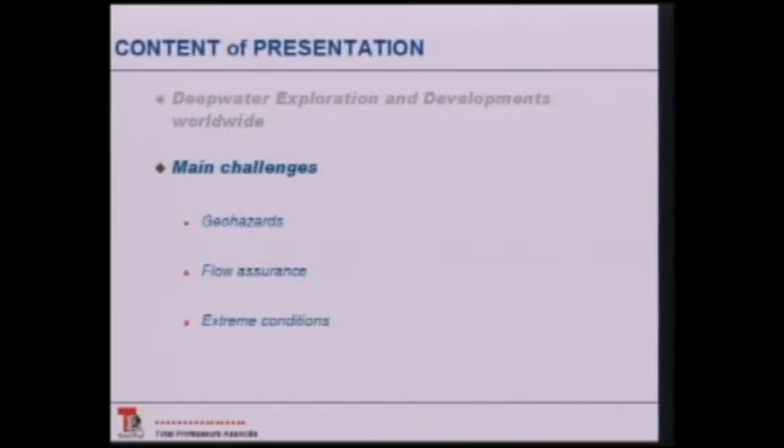So I'm going to present deep water on a worldwide basis. Then I will go through some main challenges of this activity, what we call geohazards. Geohazards are all the problems associated with the bottom of the sea, with the geology. You will see that in deep water, the bottom of the sea does not behave like it does in shallower water or onshore. I'm going to talk about flow assurance.

Flow assurance is the name given to the various methods which are utilized to ensure that the effluent produced by a well will reach the storage vessel on the surface.

And I'm going to talk about various extreme conditions in which this activity is being handled these days. If I have time, I will mention two examples of deep water fields: the Girassol field offshore Angola in an average of 1,500 meters of water, and the Canyon Express in the Gulf of Mexico in US waters.

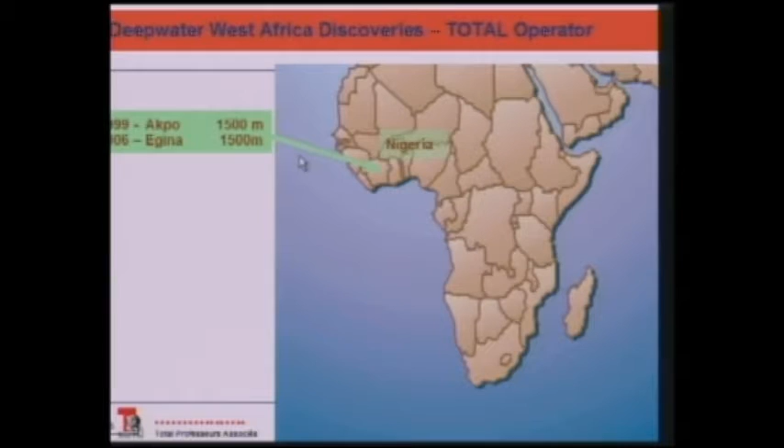I used to work for the Total Oil company as a development engineer, and I'll mention a few discoveries which have been made recently. For example, in Nigeria in '99, 1,500 meters of water, we found Akpo. I was involved in this one. Then we found Egina, 1,500 meters, Moho in Congo, Bilondo in Congo as well, and a lot in Angola.

The latest being Manjericão, in 2,000 meters of water. So far, we have developed Girassol, Dalia, Lirio, and that's about it. They are in production.

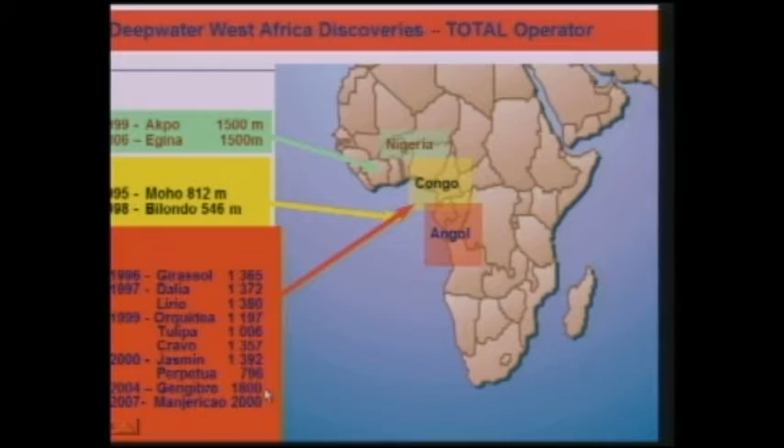All the other reservoirs have not yet been developed, are not producing, but they are under study because there are no identical reservoirs. They are all different, so it's always a different case, and we have to spend a lot of time studying the best way to develop each and every discovery.

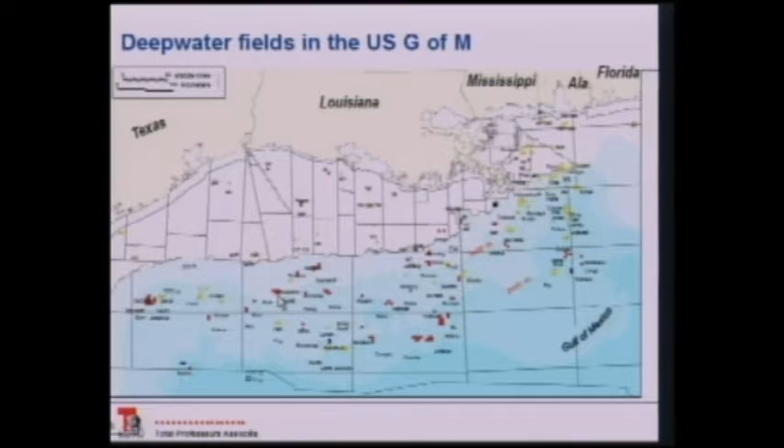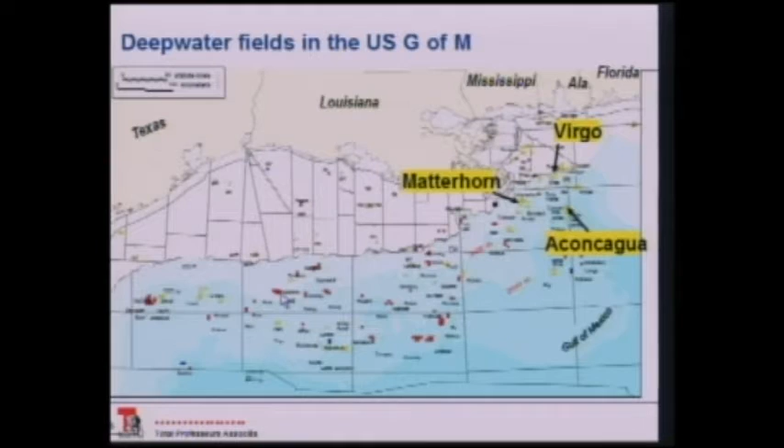And all the dots are either production or exploration of hydrocarbons in deep water. Our company was involved in Virgo, Matterhorn, Aconcagua. So that's just to show you that this is a very recent industry, I would say about 15 years old, but there is already a lot of development.

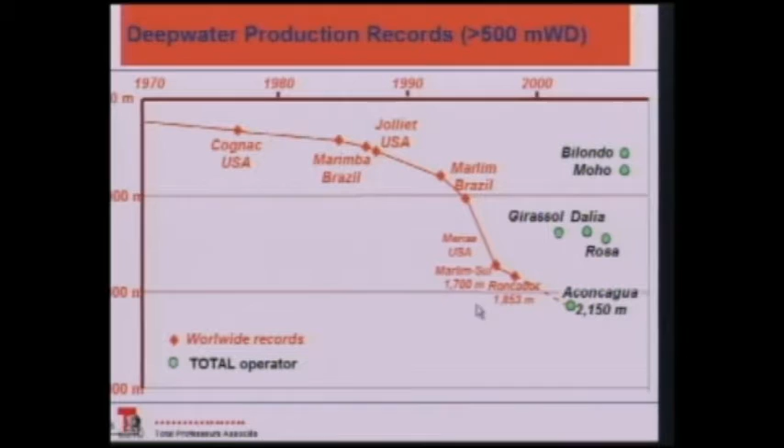So why do we go and try to find oil in deep water and ultra deep water? It's because you've heard that the world is going to run out of oil, and we try to exploit oil everywhere we can. And it's not negligible.

The industry estimates that the reserves are 200 gigabarrels. That means 200 billion barrels. I would say these days the quantity of oil which is recoverable, conventional, is 1,000 billion barrels. So it's almost 20% reserve.

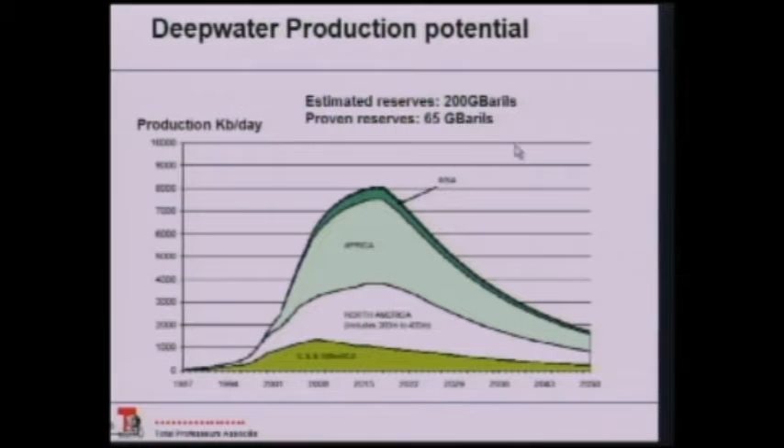Proven reserve is when you are sure that the reserves are there, that the oil is in the ground. You have been drilling, you have been making all sorts of studies. So far it's only 65 billion barrels of oil, which is very interesting. I don't know the reserve of Mexico, but it should be in the same order of magnitude.

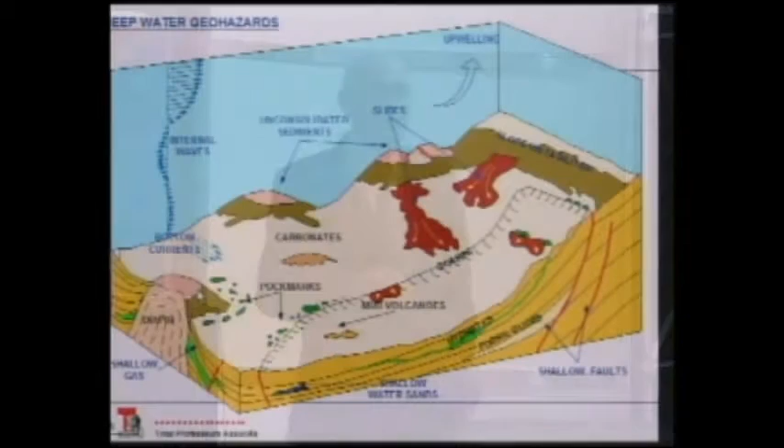So the first problem you can meet is diapirs. A diapir is a mountain of salt that crops up from the seabed like this, and quite quickly. If you don't know there is a diapir underneath and you have installed a pipeline here, there will be a problem. So you better make a very good survey before you start locating your equipment.

You have mudslides. The soil is not compacted, it's very unstable, and sometimes there are huge mudslides. A mudslide like this can be 20, 30 kilometers long.

You have mounds of carbonates. You can have pockmarks. I will explain to you what a pockmark is by showing you some seismic pictures, derived from the seismic.

You have hydrates. Hydrates are a big problem. I don't know if you know what a hydrate is. A hydrate is the result of the mixture of water and hydrocarbon gas, like methane. Under certain high pressure and low temperature, the water and the gas make some sort of ice. It looks like ice, and it can block things. For example, if you have that in a pipeline, you will block the pipeline. You can have a plug in the pipeline made out of hydrates under certain conditions.

In deep water, you have water at 4 degrees temperature. On the seabed, everywhere in the world, the water is at 4 degrees. You have gas coming out from the sediment, and when the water and the gas meet, it makes hydrates. And it makes a hydrates layer just below the seabed.

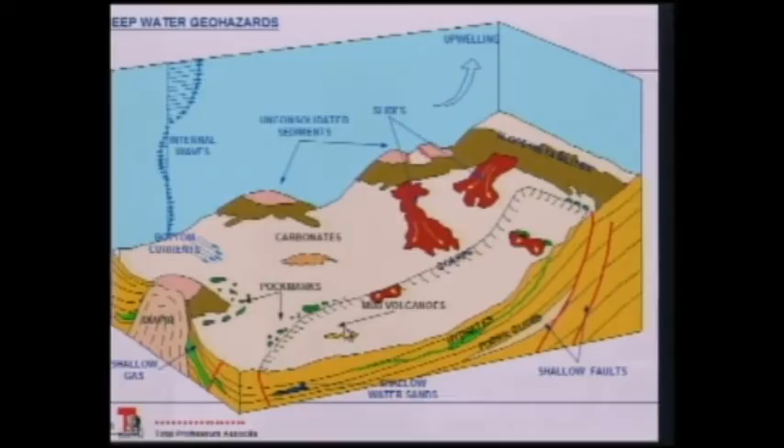You can also meet mud volcanoes. If your equipment is installed close to a mud volcano that erupts on the seabed like that, you are in trouble.

So that's some of the problems you have to take care of in deep water. This is a view - it's not a picture, because this is about 1,500 meters. This is probably 20 kilometers by 10. So this is a top view of a seabed.

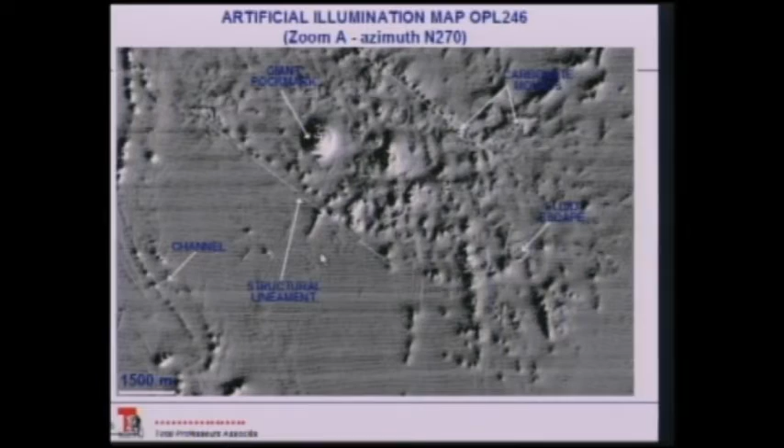offshore Nigeria on the Akpo field. You can see, for example, here a number of faults, channels, and a pockmark - I will show you what a pockmark is. So if you have to install your equipment somewhere, if you have to drill, you better drill in this area, because all the rest is very unstable.

What is a pockmark? This is a pockmark that we have taken from the previous picture, and this is a vertical cut. How do you see that? This is a 2D seismic view of the soil in depth. You see here the layer of hydrate.

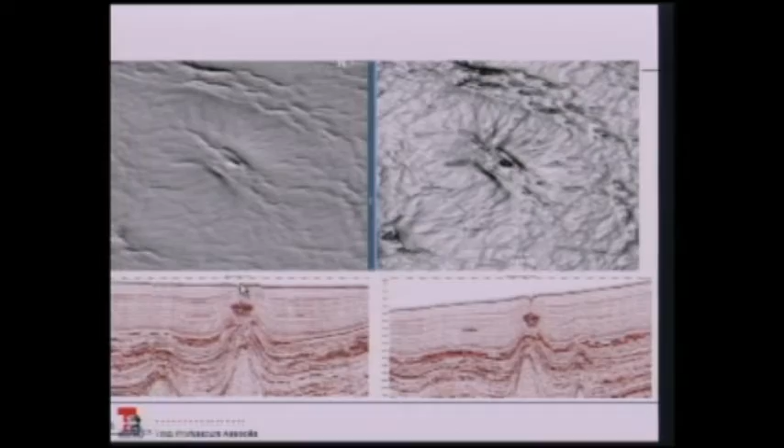Under the hydrate, you have gas trapped. Sometimes there is a leak of this gas. The gas leaks, that's what happened here. And when the gas reaches the surface, you have a pockmark. But you better not be there - if you have your equipment in a pockmark like this, you might lose it.

So before deciding what will be the shape of your development, you better have a very good preliminary soil survey.

Okay, what do we do to develop these fields? How do we work in 1,500 meters of water? We cannot build conventional platforms like you have in the Gulf of Mexico in 100 meters of water. It's too deep. So we use floaters. So this one is called a TLP, a tension leg platform, which is a floater, semi-submersible, with tethers anchored on the seabed, under tension.

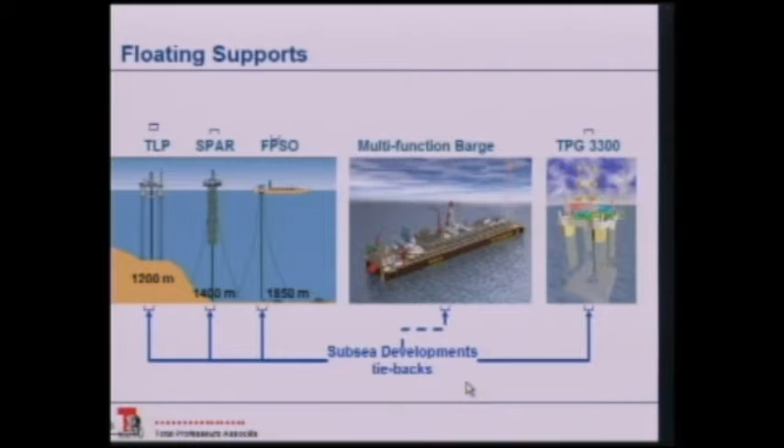These are two very special types of equipment, and I have no time to explain the details. So all these equipments, these floaters, the floating supports, are linked to the subsea development by a number of pipings, a number of links that we call tiebacks. And there are two types of development. Development with the wellheads on the surface, we call that a dry wellhead, like this, and subsea wellhead, subsea development. I will show you later an example of a huge subsea development.

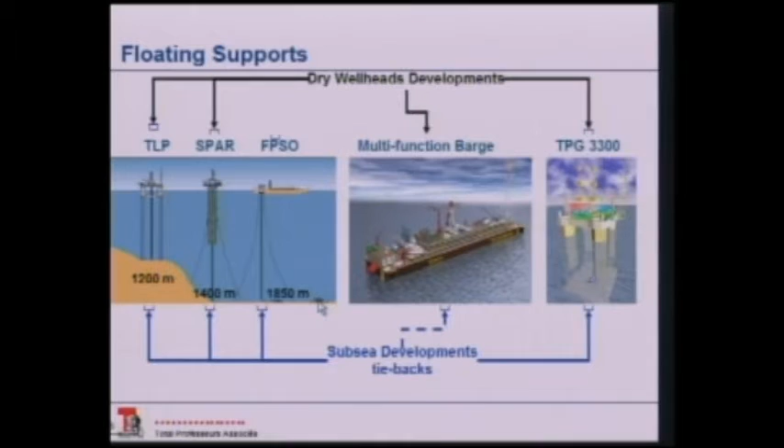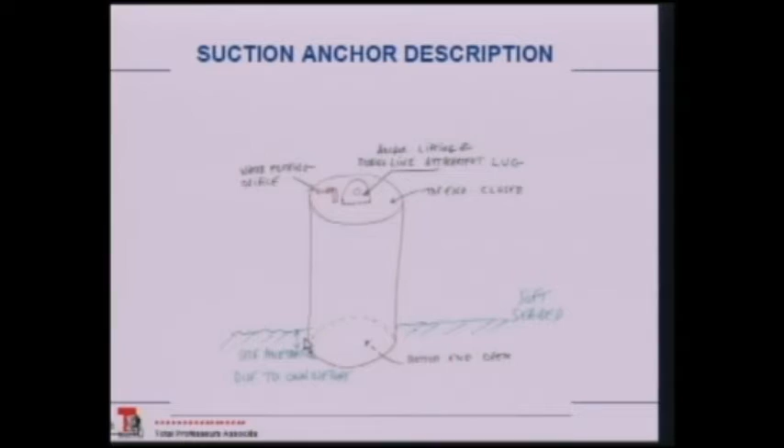So, as you are civil engineers, I wanted to show you how we can moor such big, huge floaters on the seabed. So what we use is a suction anchor. A suction anchor is a big cylinder, about 5 meter diameter, 10 meter high. The bottom of it is open, and the top of it is closed. So you just lower it down on the seabed, and it will penetrate the seabed by, I don't know, 1 meter maybe due to its weight. But that's not enough to install it as an anchor.

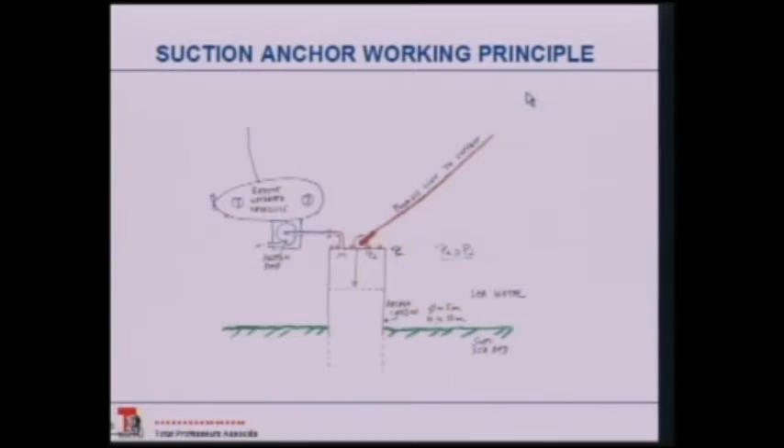What we do, we come with a remote operated vehicle, which is a remote control submarine. This submarine has a pump. It connects the pump to a pipe fitted on top of the suction anchor and starts pumping the water out. So as soon as you start the pump, the pressure inside the caisson reduces, the pressure outside is still the same, and it creates a very important force that drives the caisson all the way down into the seabed. And you have your mooring line going all the way to the surface, to the vessel that you want to moor. This is mostly used in very deep water. The reason being that in deep water, the soil is always very soft and the caisson can penetrate easily.

Okay, the next subject is flow assurance. This is a fixed platform, and not far away offshore you have an FPSO producing oil and gas in very deep water. This is a conventional fixed platform like what you have in the Gulf of Mexico, and the reservoirs are at the same depth. This is the reservoir. But this reservoir is much warmer than this one because the weight of the layer of soil here is higher. You have more sediment than here.

So here the effluent goes out from the well at 80 to 90 degrees, whereas for the same depth of reservoir, in deep water it goes out at just 50 to 60 degrees C. This is due to the fact that the density of the sediment here is much heavier than the density of the water. That's why the temperature here is lower in deep water.

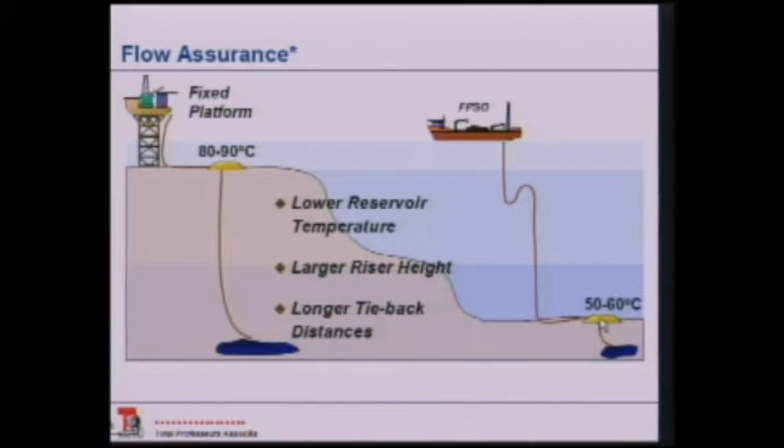You will also see that here the distance that the pipe is running in the water is shorter than in deep water. And when the pipe is running on the seabed like this, the effluents in the pipe are going to be refrigerated. They are going to see the 4 degrees centigrade of the seabed temperature, and the effluents reaching the surface will be at a lower temperature than when they get out of the well. So if your effluents are colder, the viscosity of the effluents is increasing, and it's more difficult to extract this effluent.

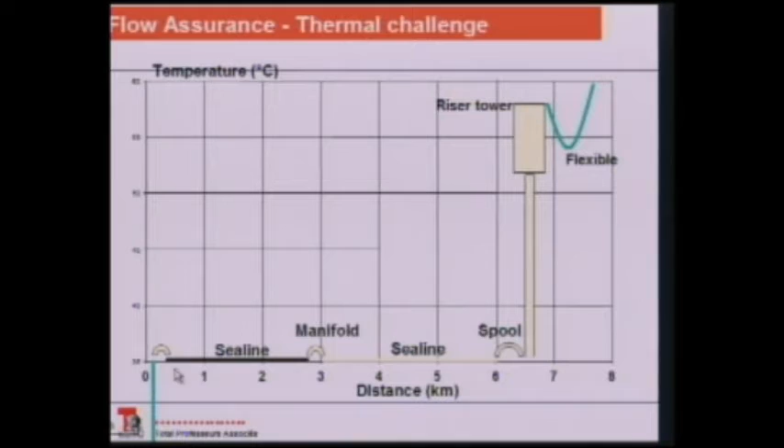So what we normally do, I'm not going to explain in detail this scheme, but what we normally do is we install insulation on, this is a schematic showing the well, the flow line on the seabed, and the riser going all the way to the surface. So what we do, we install insulation on the sea line and on the riser to keep the product warm. And we don't do that normally at a conventional water depth.

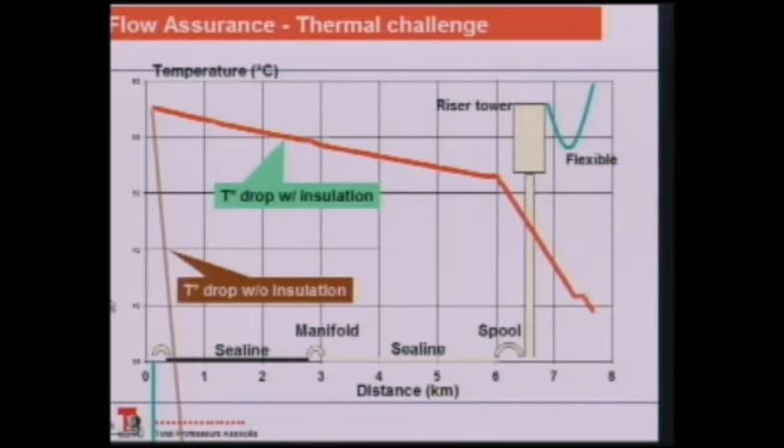So what are the problems associated with flow assurance? One is in deep water. One is the hydrates. The hydrates, what do you do to prevent hydrate? Thermal insulation, heating, and we can circulate the oil in the system to avoid the temperature of oil to drop below a certain figure. We have wax deposition. So we use thermal insulation, we heat the lines, and we pig the line.

We have a phenomenon which is called slugging. Slugging is when you have a mixture of gas and liquid in a pipeline, and all of a sudden you produce only gas, then you produce liquid, then you produce gas again, and this is very disrupting for the production. We call that slugging. So to avoid that, we use what we call the gas lift system, which has to do with injecting gas at the bottom of the riser.

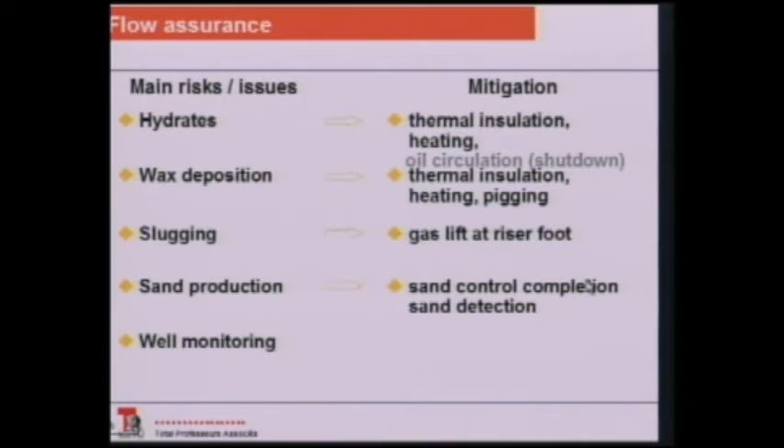We produce sand, so we have sand control completion. In other words, in the wells, we install filters that prevent the sand from being taken away by the effluents. And we have also well monitoring. We check the downhole pressure and temperature, and we test the wells.

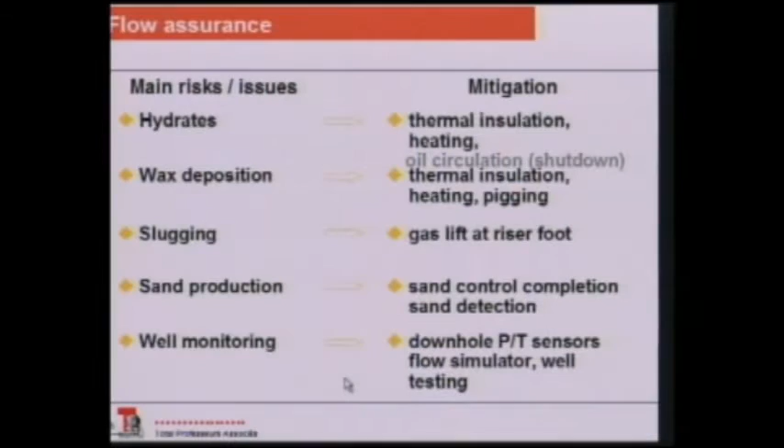Another method is coming these days. You can see the FPSO, you can see the riser and the flow line going all the way to the wellhead. So in order to be able to circulate the oil from the well to the vessel at a very long distance, here we show distance between 10 and 25 kilometers, what we do is we install a multi-phase pump on the seabed, close to the wellhead. These pumps are able to increase the pressure of the effluent made of water, mud, oil, gas, all these things. So this is one possibility to ensure that the effluents will reach the FPSO.

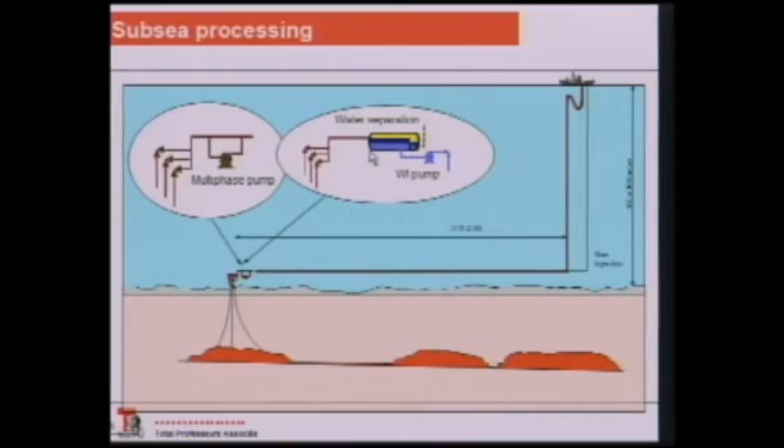Another possibility is to separate the water on the seabed, here, next to the wellhead, and inject the water in the ground in order to reduce the flow of liquid in the line. You can imagine that to install this equipment in 2,000, 3,000 meters of water is quite a challenge. So this processing equipment is being developed these days. They are not fully operational.

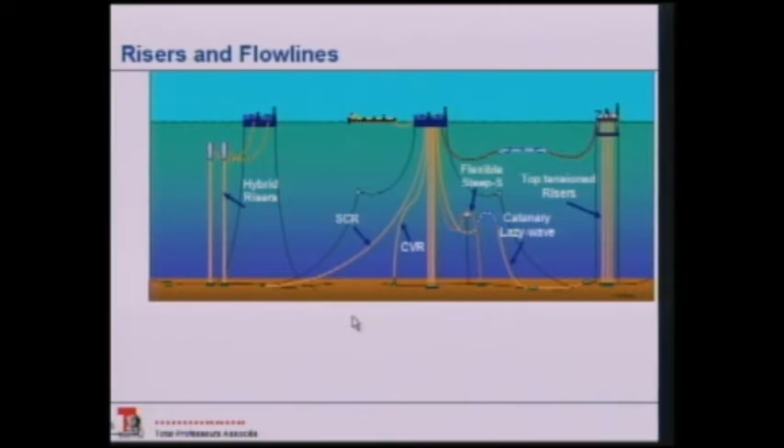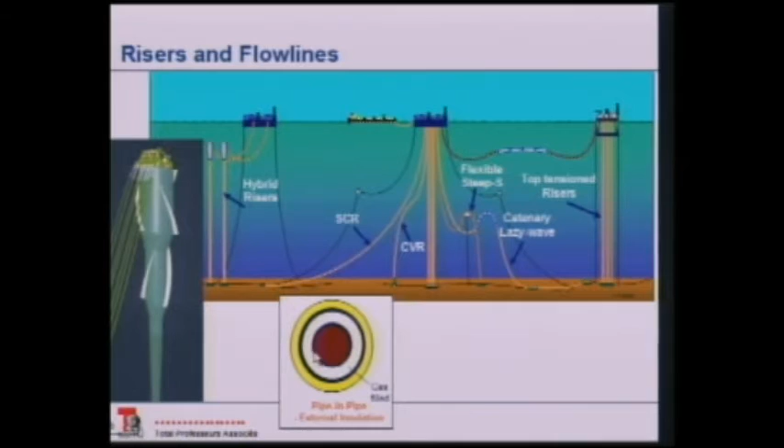This is an enlargement of the top of the hybrid riser, where you can see the rigid part of the riser and the flexible part going to the support vessel, to the FPSO. This shows you how the steel catenary risers are being insulated. You have the pipe itself surrounded by another pipe, and in the middle you have a gas. This is the best way to insulate a bundle of pipes, because the heat transfer through the gas is very low.

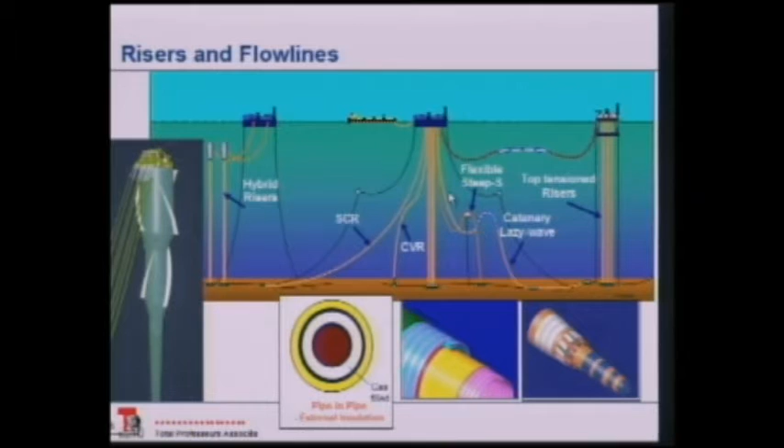This is a flexible riser. This one has a number of small bore pipes, where you have hot water going through, and that heats the riser over a considerable distance. So that helps prevent the heat loss of the effluent during its transfer across the column of water.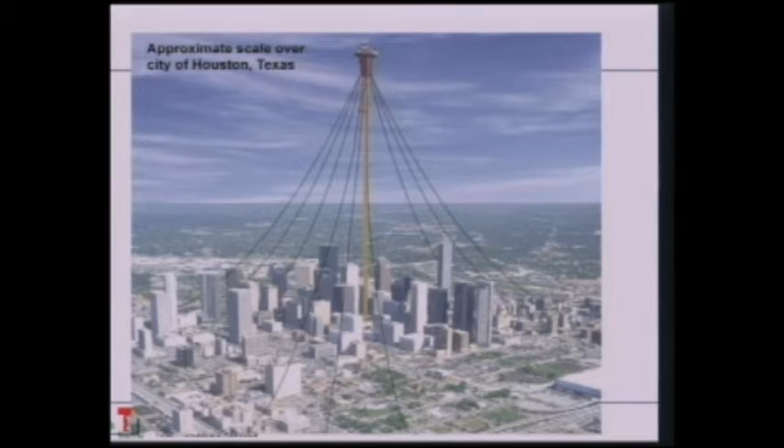So now I'm going to show you an example of a field which has been developed since discovered in 1997 and put in production in 2002, I think. So this is offshore Angola here. This is offshore Angola, and the field is around 1,350 meters of water depth.

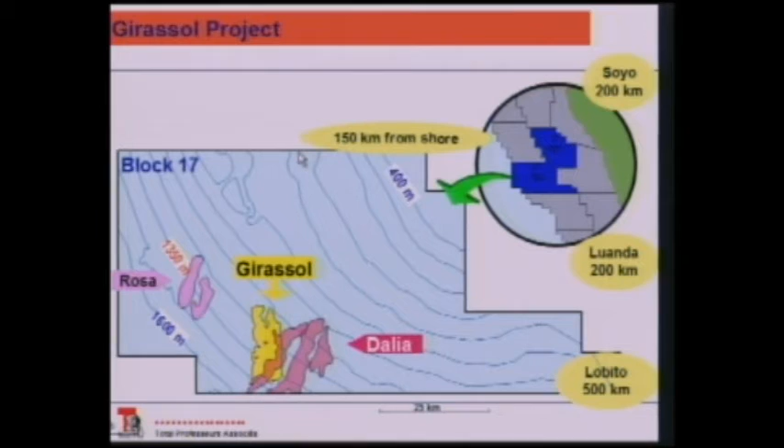So you have the reservoir of Girassol here. Next to it, we found another one, which is called Dalia, which is now producing also. The third one, Rosa, Lirio. All these fields are producing these days. They are between 1,600 and 800 meters of water. Jasmim, that's all.

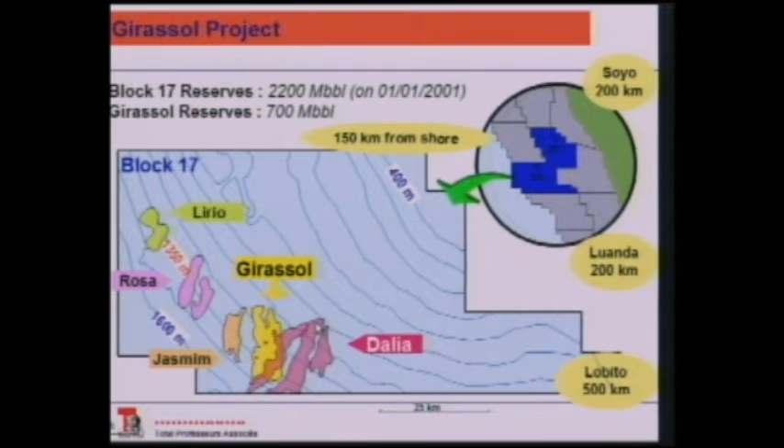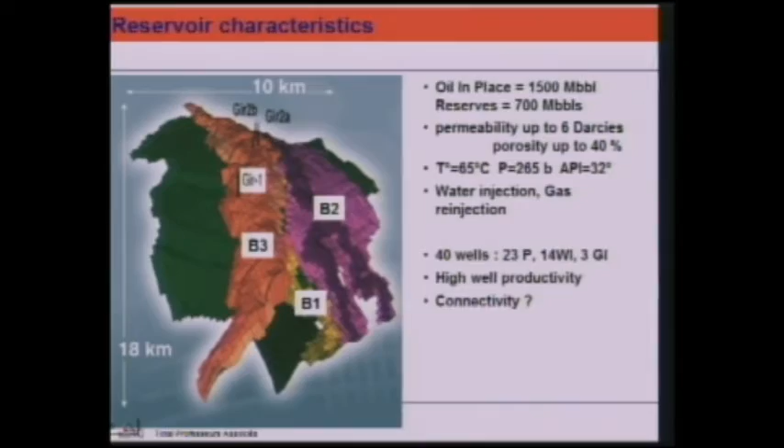What I'm going to tell you is that to produce this reservoir here, we had to install 23 production wells, 14 water injection wells and 3 gas injection wells. We use water injection and gas injection to keep the pressure of the reservoir at a good level to allow the oil that we want to recover to get back to the surface.

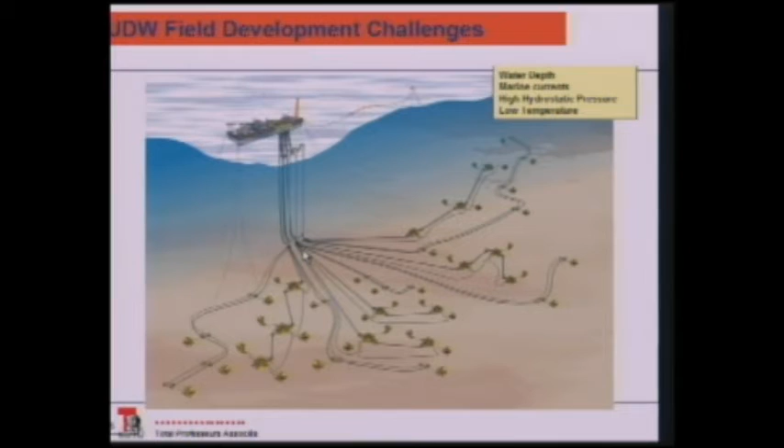The problems: water depth, marine currents. There are a lot of currents in this slice of water. High hydrostatic pressure. On the seabed, we have 150 bar pressure due to the seawater. Low temperature, 4 degrees centigrade. Formation of hydrate and wax. So we need thermal insulation, heating of all this network of pipe.

All this equipment that you see on the seabed, we will go in a little bit more detail. They are installed in 1,300 meters of water, and if something goes wrong, you are in trouble. So they better be very reliable. And before installing a piece of equipment on the seabed, we run a lot of tests. And we make sure that the rate of failure of the equipment will be very low over a period of 20 or 30 years.

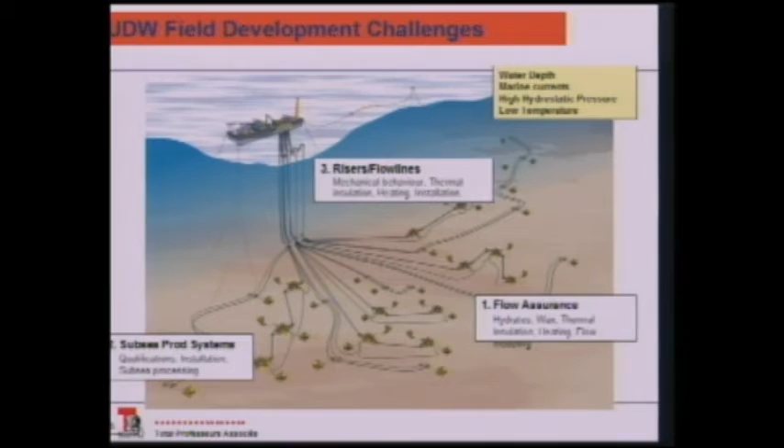Regarding the riser and the flow lines, we have a problem of mechanical behavior because the vessel moves, heaves, goes like this, and the riser has to follow, and we have a lot of problems of fatigue. So the steel, the material that we are using must be very resistant to fatigue. And of course, to install all this equipment on the seabed means a lot of installation problems, means very big vessels to be able to install this equipment, very specialized vessels.

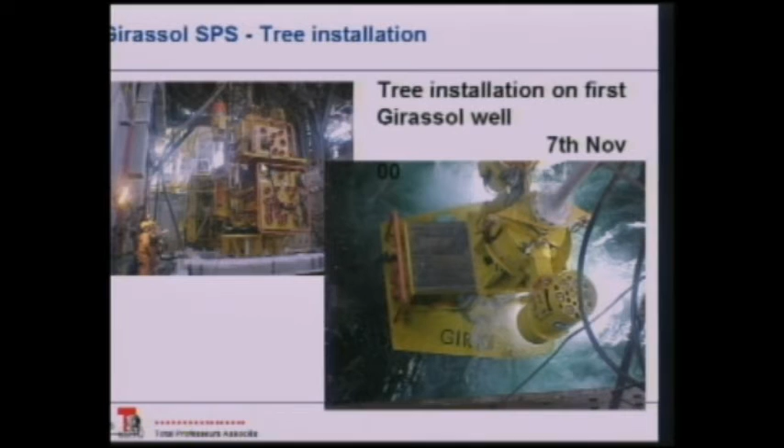This has to be done when there is a problem with the valve. Normally, the valves are electrohydraulically operated, and they can be remote controlled. But if there is a problem, you can do something with your submarine.

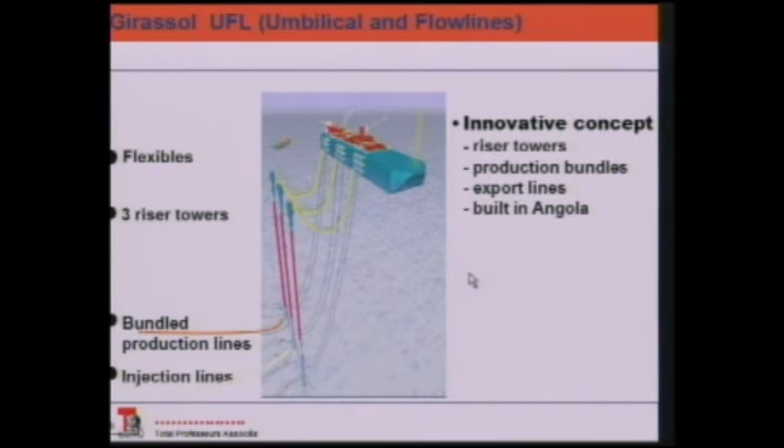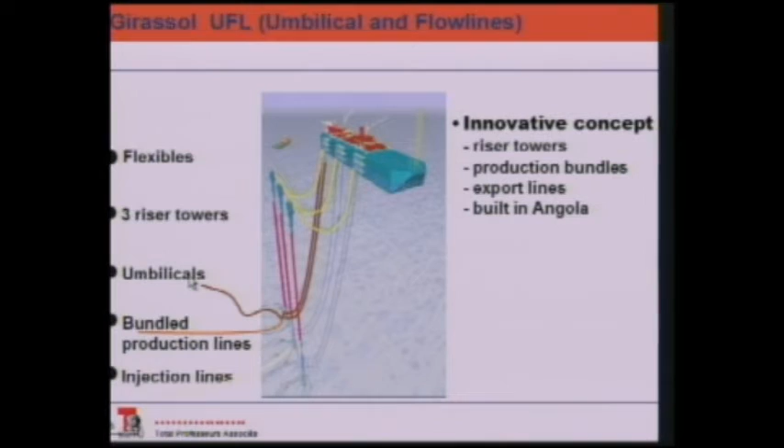This is the FPSO, the 3 risers. Then we have the production line coming to the bottom of the riser. We have injection lines. We have the 3 riser towers. We have flexible hoses between the top of the riser tower and the vessel. We have umbilicals. These umbilicals are utilized to control all the wellheads, the manifold, all the subsea equipment, which is electromechanically operated.

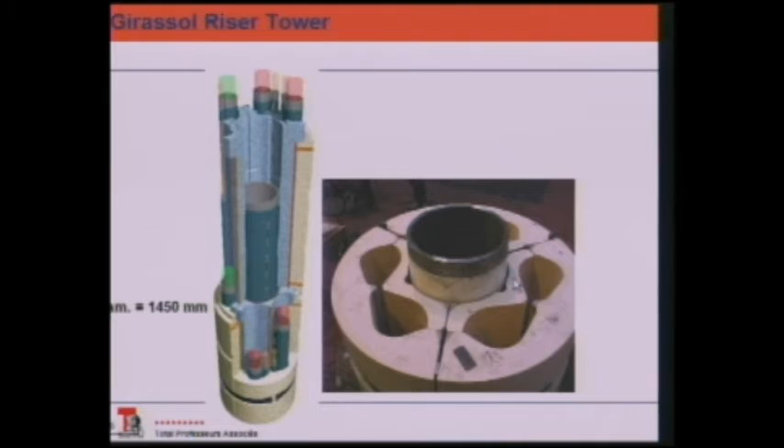And 2 export lines to the mooring buoy. So this gives you an idea of the rigid section of the riser. So you see the external diameter is 1.5 meters roughly. Inside there is a 22-inch pipeline.

There is foam for insulating the various pipes. I told you that to prevent a problem with low temperature in the effluent, we have to insulate. So we use foam. Very special foam that can stand the external pressure.

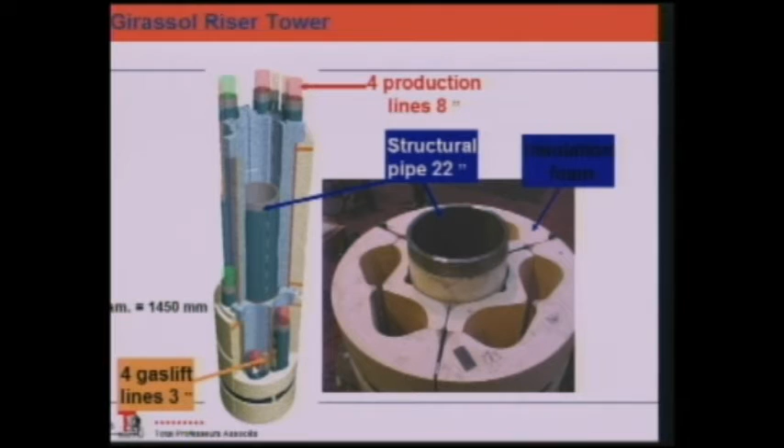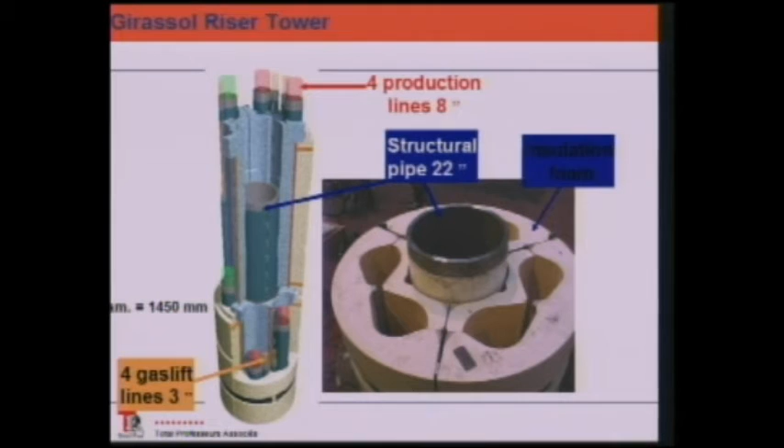On this picture, you can see the 4 production lines. You can see 4 gas lift lines. There is 1 gas lift line per production line because we inject the gas in the production line to help the flow of effluents. We have 2 injection lines for water, 8-inch. That's about it.

This is a view of one element of the subsea bundle lying on the bottom. Again, you have 2 8-inch production lines. Why 2? Because we need to circulate the oil sometimes in case of breakdown of one equipment. We want to circulate the oil in order to avoid blockage due to hydrate, for example. We have a service line. Sorry.

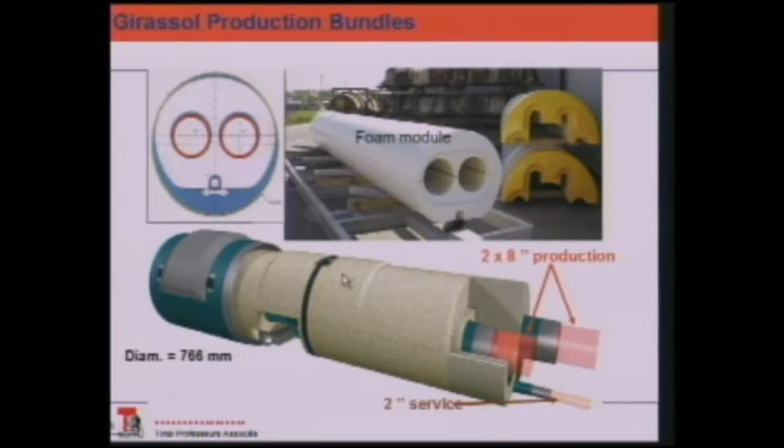So this line, we have, I think, more than 120 kilometers of these bundles. They were fabricated onshore in Angola in one piece, and they were towed on the seabed, dragged on the seabed with a tug, over a distance of about 400 kilometers between the yard where they were fabricated and the site, and then installed carefully in place close to the various pieces of equipment they should serve.

This is a picture of the FPSO when it was built in Korea. At that time, it was not possible to build a bigger vessel than this one. It was the biggest vessel you could build in Korea, where we had the biggest, how do you call that? Shipyards.

This vessel is 300 meters long, 60 wide, and 30 meters deep. The dry dock in which it was built was 61 meters wide. So there was only half a meter spare on each side of the hull when we got the vessel out of the dry dock.

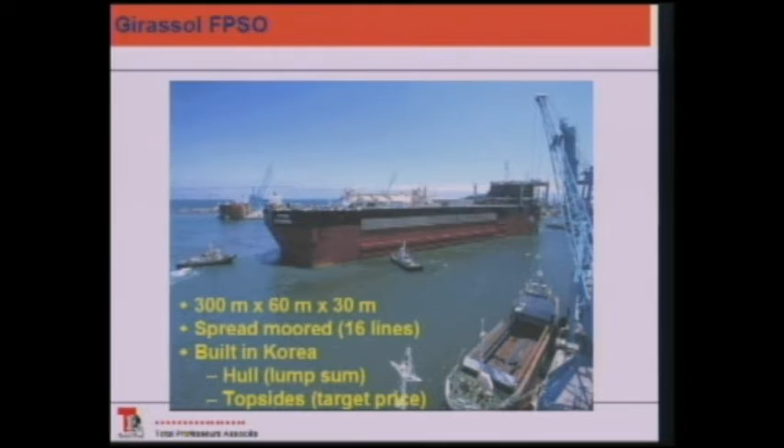This is another project. It's a project that we managed in the Gulf of Mexico. So we had to lay a pipeline that would drain three different fields belonging to various owners. But it was more economical to have one pipeline for 3 fields than one pipeline per field.

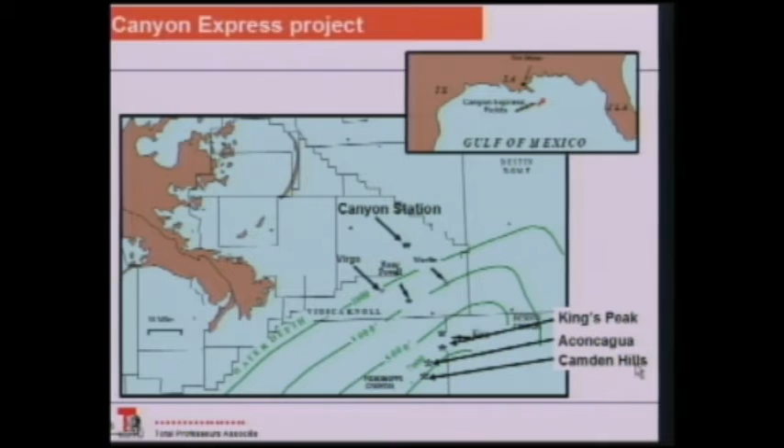So the 3 fields were King's Peak, Aconcagua, and Camden Hills. So this is an artist's view of the area. You have the platform of Virgo, another platform named Neptune, a third one named Marlin, and Camden Hills here, Aconcagua not far away, and the last one King's Peak. And the game was to link these 3 fields to Virgo with one pipeline. This is in 2,000 meters of water. So this is how the pipeline looked.

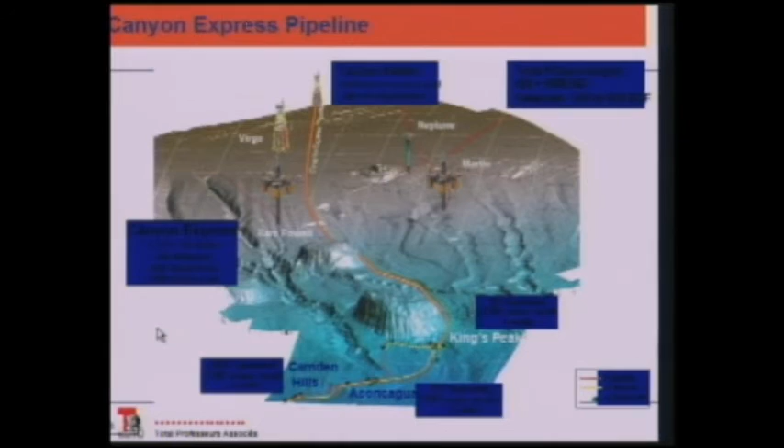As the three fields belong to different owners, it was necessary to meter, to get a measurement of the quantity of gas produced. So on each well, we had a gas metering system.

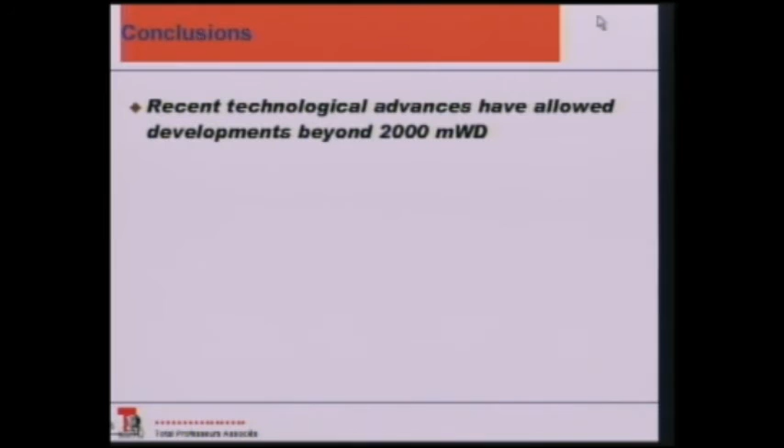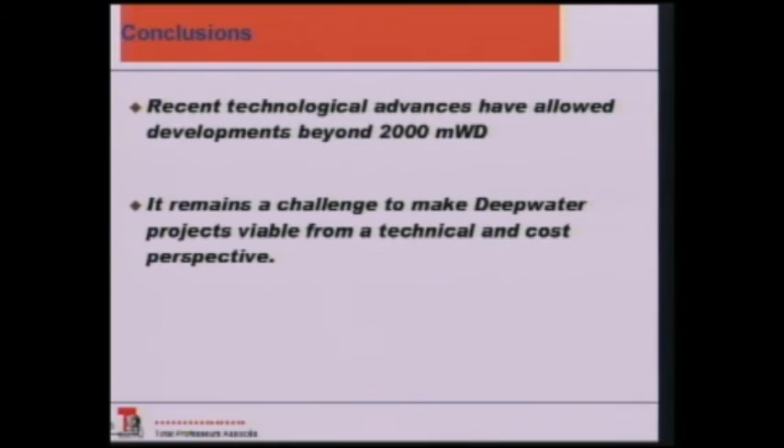Okay, I'm just going to give you a conclusion. Recent technical advances have allowed development beyond 2,000 meters of water. We are roughly at 3,000 meters of water. I don't think that we will go very much beyond that in the coming days. It's a challenge to make a deepwater project viable, not only from the technical point of view, but from the cost point of view. These days, the prices of development are jumping very high.

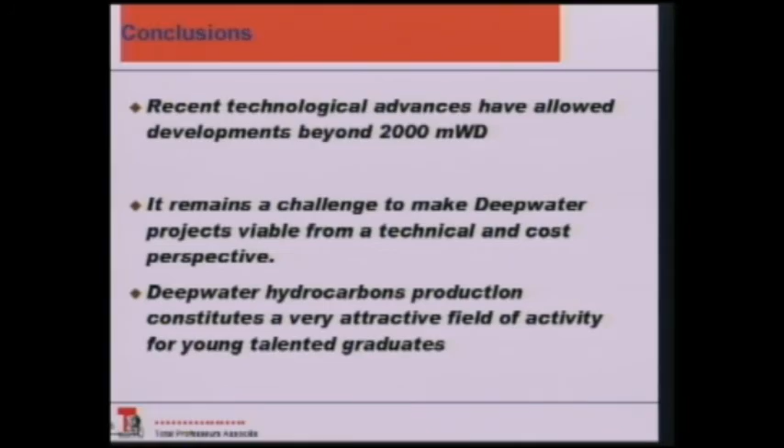And one of the reasons why I'm here is that I'm trying to convince young engineers like you to join this industry. In this industry, there are absolutely fascinating challenges to be met, but this industry is not very well known. So this presentation was to try to give you an incentive to come and join our deepwater industry.